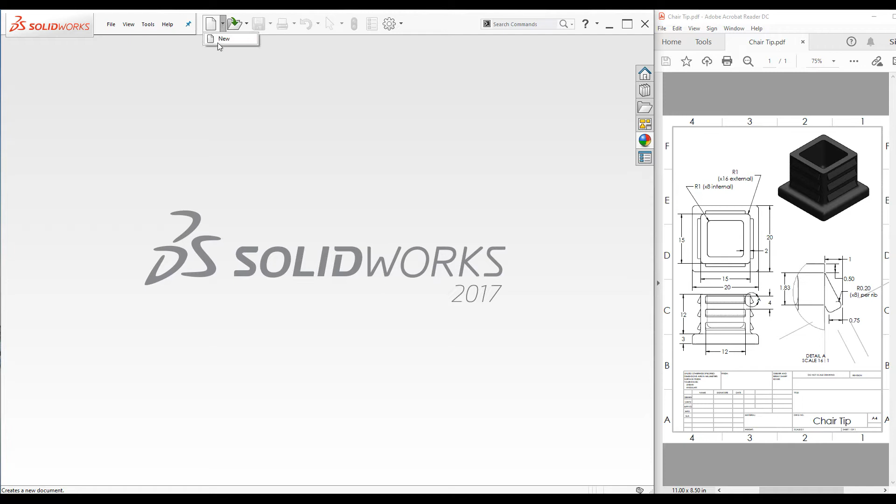In this video I am going to model this chair tip using basic SOLIDWORKS commands. Let's get started and stay tuned. To start off, open up a new part file, click on new, select the part template and click OK.

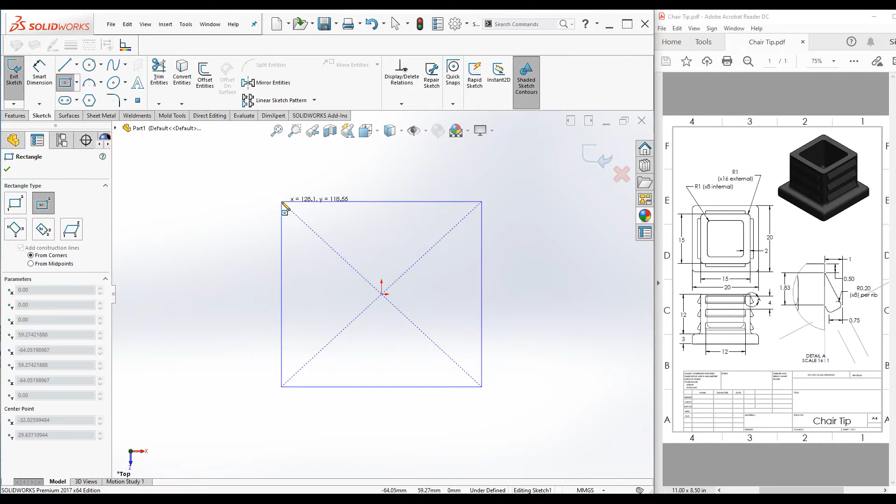Let's begin the sketch on top plane to create this base extrusion. Select top plane and from the context toolbar select sketch. Now we are in the sketch mode. Expand the rectangle tool and select center rectangle. Draw the sketch starting from origin. Dimension the sketch 20 by 20. Select dimension and vertical 20 millimeter and horizontal 20 millimeter and click OK.

Now select the feature tab, click on Extruded Boss command. The extrusion is 3 mm, enter the value 3 mm and press tab key. You can leave the other options as is, the direction 1 blind, and click OK.

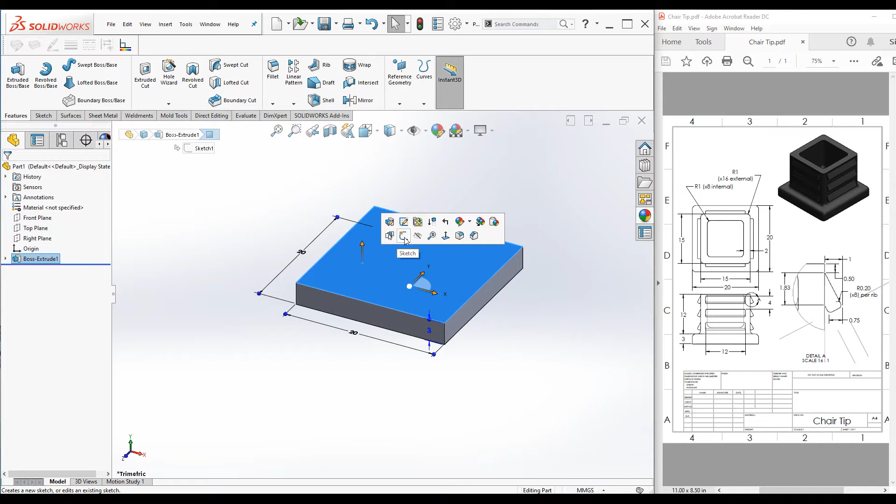Now select the top surface and again click on sketch command from context toolbar. Press Ctrl 8 to have sketch plane parallel to computer screen. Again select center rectangle, draw the sketch. Add dimension horizontal 15 mm and vertical 15 mm. Enter 15 and vertical enter 15.

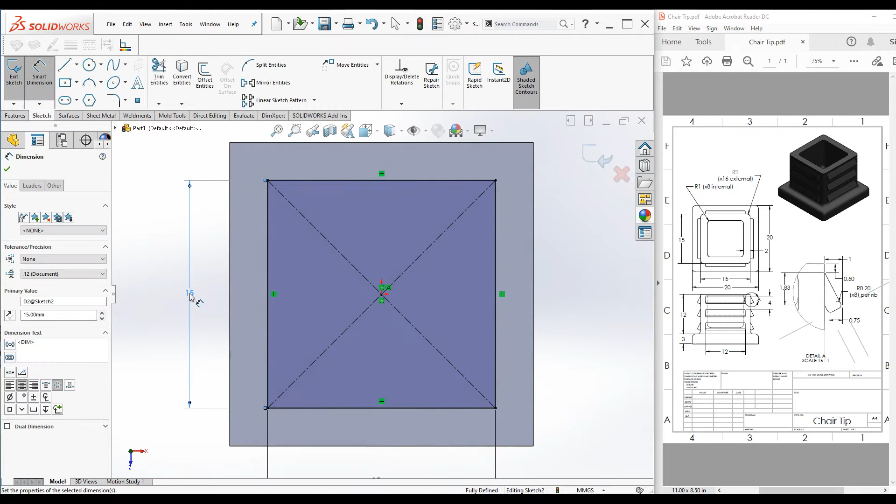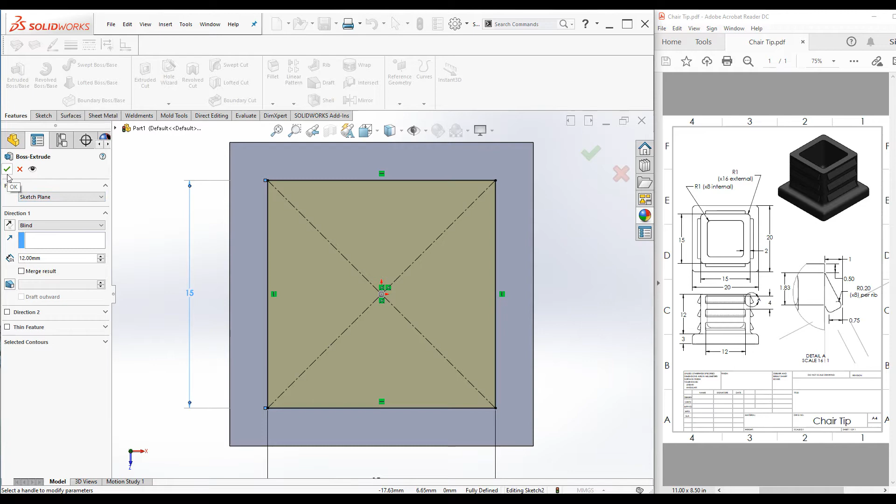Now again click on feature tab, select Extruded Boss command. Over here the height of the extrusion is 12 mm, enter 12 mm and make sure this merge result option is unselected. We need to have two separate bodies to perform the next operation. So press Ctrl 7, and preview looks good and click OK.

Now we are going to create this cutout using shell command. Since we did not merge these two bodies together, you can see there are two solid bodies created. Now go ahead and click on shell command. Shell property manager is presented. Under this selection box, faces to remove, select the top surface. Now click on show preview and enter the thickness value 2 mm.

You can see the preview looks good. You can select this option if you want the shell to be outside, but we need it inside, and all the parameters are selected. Preview looks good and click OK.

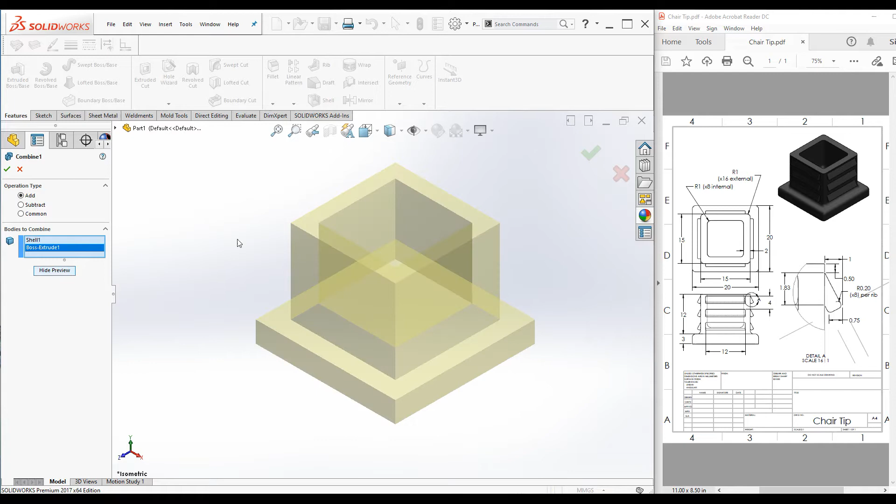Now we can use the combine command to merge these two solid bodies together. Click on insert, select features and click on combine. Operation type add, under bodies to combine, select top body and bottom body. Show preview, preview looks OK, click OK. Now we have one single body.

The next feature is the rib feature. This rib is used to secure the chair tip firmly to the leg. This is not the rib feature that we discuss in SOLIDWORKS. These are not the same, so I'm not going to use the rib command, and to create this rib feature I will use Extruded Boss command.

Let's begin the sketch. Select front plane and select sketch from context toolbar. Press Ctrl 8 to have sketch plane parallel to computer screen, select line tool and draw a 4-segment profile which is approximately similar to the shape of the ribs. You can see the details of the rib from this detailed view. So I will start from here and draw a 4-segment profile like this, and exit the command.

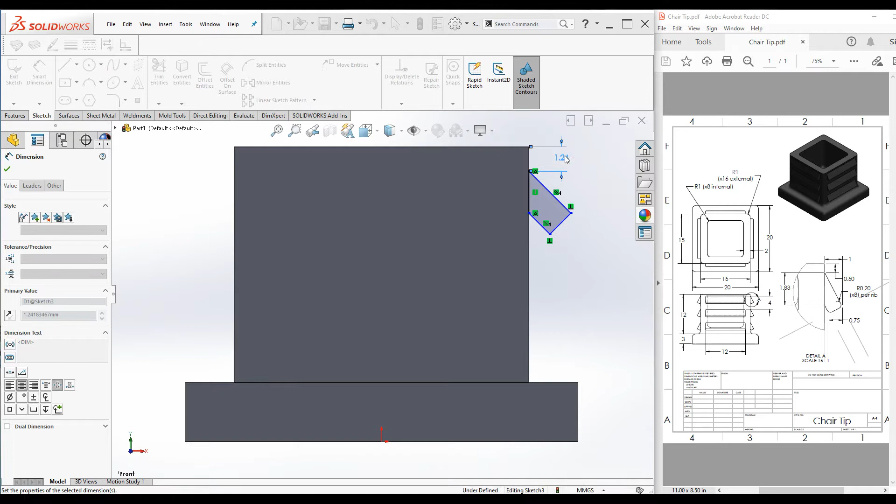Now let's add dimensions and relations. These two are parallel to each other. Select this line, press Ctrl and select this line. Then from this property manager select parallel and click OK. Now let's add the other dimensions. The dimension to this point from top is 0.5 millimeter, and dimension from this point to this edge is 1 millimeter.

And dimension from this point to this point, oops, I will drag this line a little bit down, and let's add dimension 0.75 millimeter from this point to this point. Select this point and select this point, enter 0.75 millimeter, and this line is 1.53 millimeter. 1.53, press enter, and sketch is fully defined.

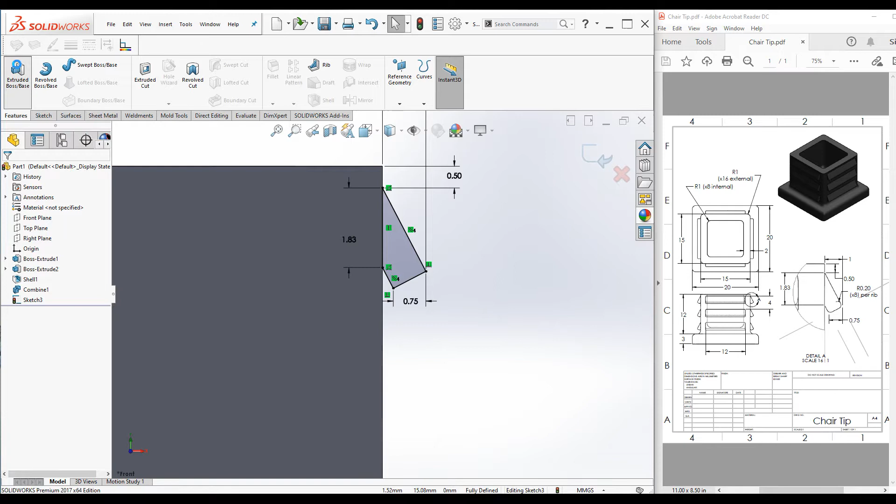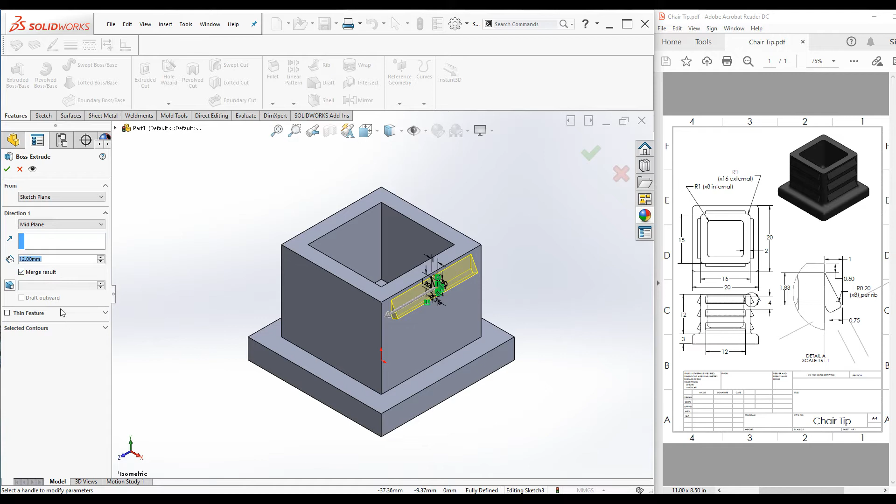Now exit dimensions, go to features, select Extruded Boss command, click here and press Ctrl 7 to have isometric view, and under direction 1 change the end condition to mid plane, and overall extrusion length 12 millimeters. We can keep this option selected, merge results. Don't worry about the other options and click OK. Here we go.

Now let's add the fillet feature to the rib, which is 0.2 millimeter fillet radius. There are 8 fillets per rib: 1, 2, 3, 4, 5, 6, 7, 8. Total 8. Press Ctrl 7. As I mentioned in my previous tutorials, it is always good practice to leave fillets and chamfers towards the end of the design. But in this particular case, we need to add the fillet feature to the rib so that we can use it in the next operation.

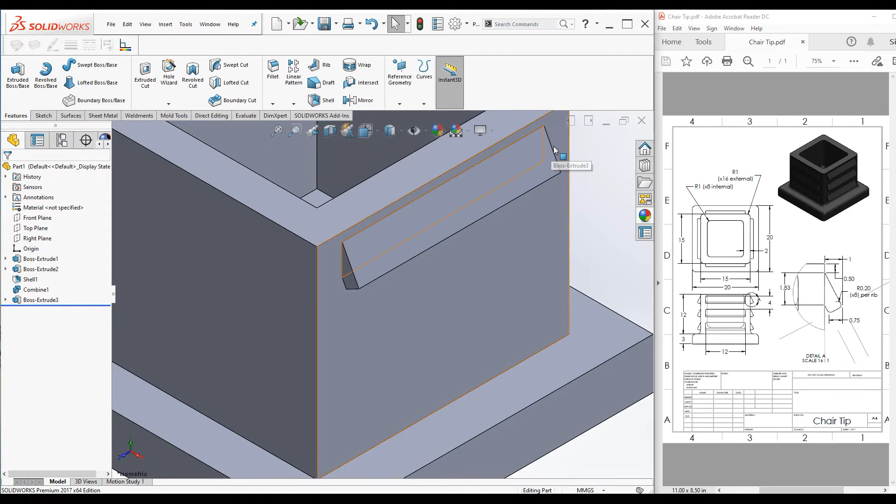We are going to create the other instances using pattern feature. In order to create other instances, we need to have a completed rib including all the fillets. So we need to add fillets to these ribs. Go ahead and click on fillet command under feature tab, and here we have got 2 options. We are not going to discuss FilletXpert today, so use this option, and the fillet type is constant size fillet.

Under items to fillet, we are going to select these 8 edges and make sure show selection toolbar is checked so that we can quickly select a set of entities together. We don't need tangent propagation for this particular rib, and make sure full preview is selected. For fillet parameters, keep it symmetric and enter the value 0.2 millimeter.

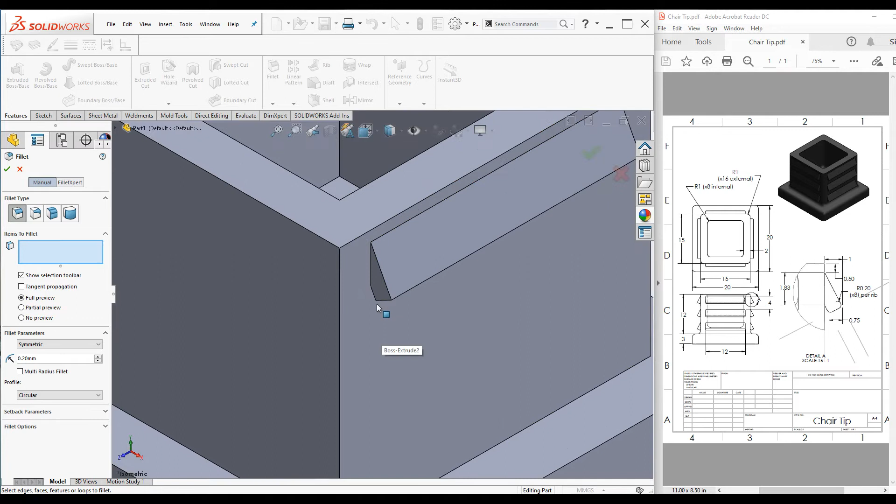Press tab key. We don't use multi-radius and profile is circular. You can leave other options as is. Now let's select edges under items to fillet. When we click on one edge, the pop-up toolbar appears, which helps you to select a set of edges at the same time quickly. This toolbar appears when you have this option selected, show selection toolbar. Click on one edge, then you can see the selection toolbar appears.

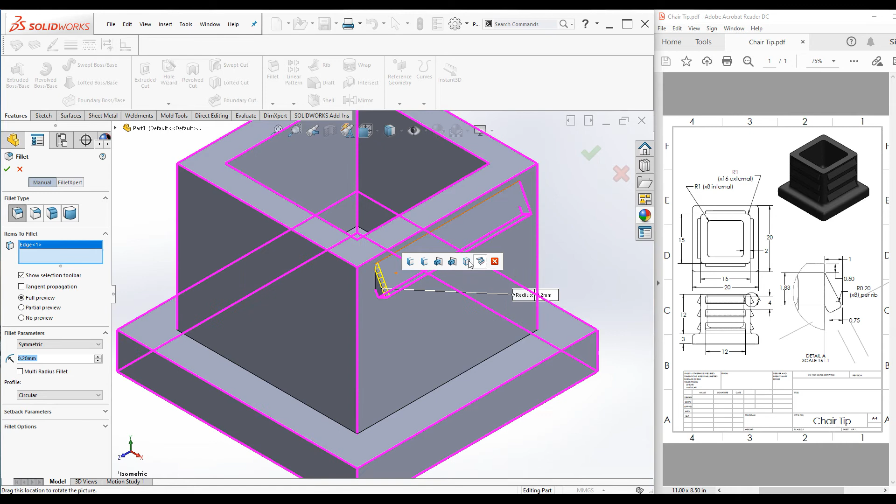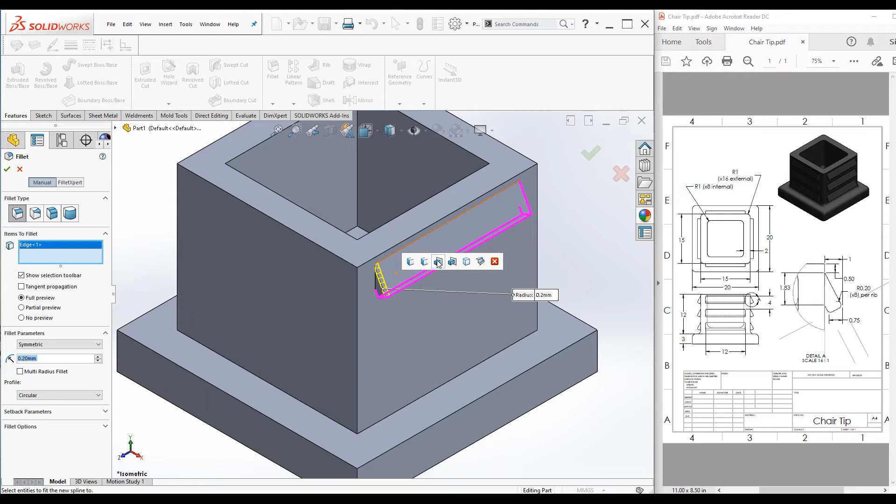So hover your mouse over each icon, then when you get the highlighted edges as per your needs, click on that icon. So this is what we need. Total internal to feature 7 edges, including the selected one, total 8 edges. You can see the preview and click on this icon. All the 8 edges are selected and preview looks good. Click OK. Press Ctrl 7.

Now we are going to use linear pattern command to create other 2 instances on this same surface. Go ahead and click on linear pattern command under feature tab, and the linear pattern property manager is presented. Since we had selected these features, they are already selected under features and faces. Look at this property manager. We have to select the direction. I will select this vertical edge, and you can see the preview since the fillets are already selected.

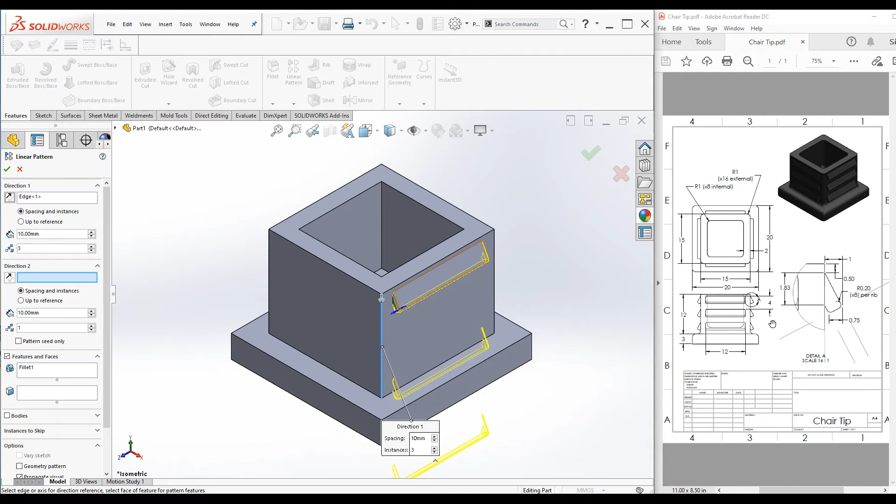I will reverse the direction, and here is the spacing. I will change the spacing to 4 mm. Between the 2 ribs it is 4 mm. And next, number of instances I will change to 3. We don't have direction 2, leave it empty. And under features and faces, here we can select faces to pattern, here we can select features to pattern, and also you can select bodies to pattern. In this case we don't have any bodies to pattern, so we are going to use this option, features to pattern. The fillet is already selected.

I'm going to select the last extrude feature of the rib. Now preview looks good, spacing 4 mm, 3 instances. You can leave other options as is. You can have this full preview and click OK. Here we go.

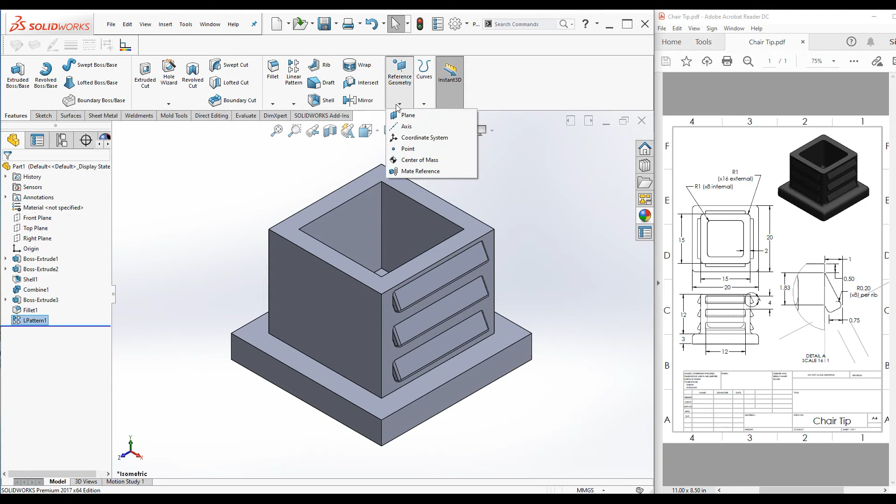Now the last command. We are going to use circular pattern command to create all other instances. Go ahead, expand this linear pattern command and select circular pattern. Before that, we need to do one more thing. We need to create an axis, pattern axis. I'm going to use reference geometry command. Expand reference geometry, select axis. Under selection, select front plane and select right plane. Axis is created at the intersection, which is the origin of the part. That is what we need, and click OK.

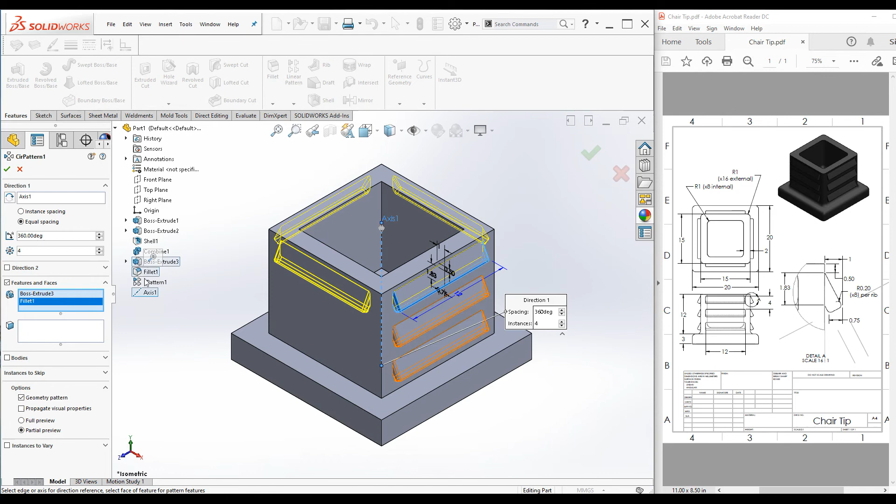Now we have created the axis for revolution, and go to linear pattern and select circular pattern. Under direction 1, pattern axis, select the axis that you just created. Keep equal spacing, angle keep 360 degrees, instances as 4. We do not have second direction. Under features and faces, select last extrude of that rib, select fillet feature and select linear pattern feature. You can see the preview, and also make sure for this operation geometry pattern is checked.

If it is not, click on this, see what will happen. You can see rebuild error. Usually this happens when we try to pattern a fillet feature. So if this happens, always use geometry pattern option. It will give you the same results. So now every option is selected and click OK. Here we go. Right click on axis and hide the axis.

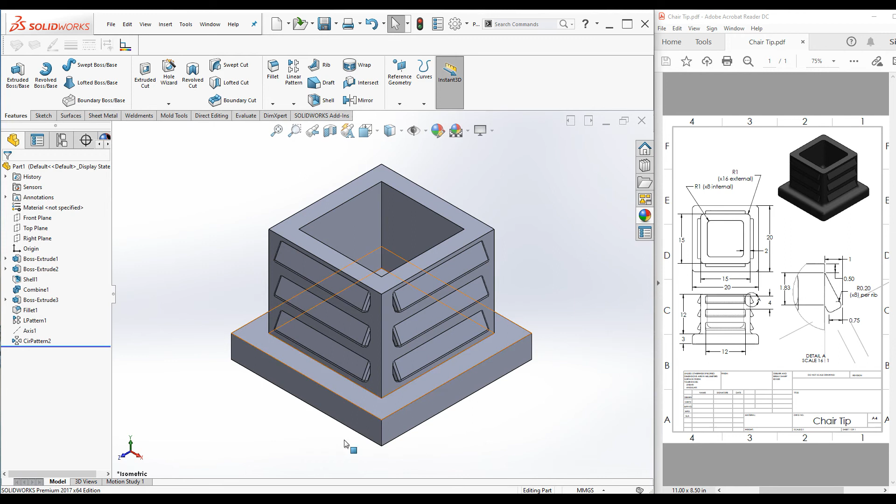Now the last operation, which is the other fillets. We will have 8 internal fillets and 16 external fillets. Both are 1 mm radius. So let's go ahead and click on fillet command. Use fillet type as constant size. Let's use this show selection toolbar option so that we can select a set of edges at the same time. Fillet parameters, keep it symmetric and change the radius to 1 mm. Press tab key.

And now let's start selecting edges. Click on this particular edge and use selection toolbar to select all the edges at the same time. When you hover your mouse over this icon, you can see 8 edges are highlighted. So click on that icon. So 8 edges are selected. Those are internal edges. Now there are 16 external edges. So let's try to add them to the same selection box. Click on this particular edge and hover your mouse over each icon. See if you can highlight all the edges at the same time.

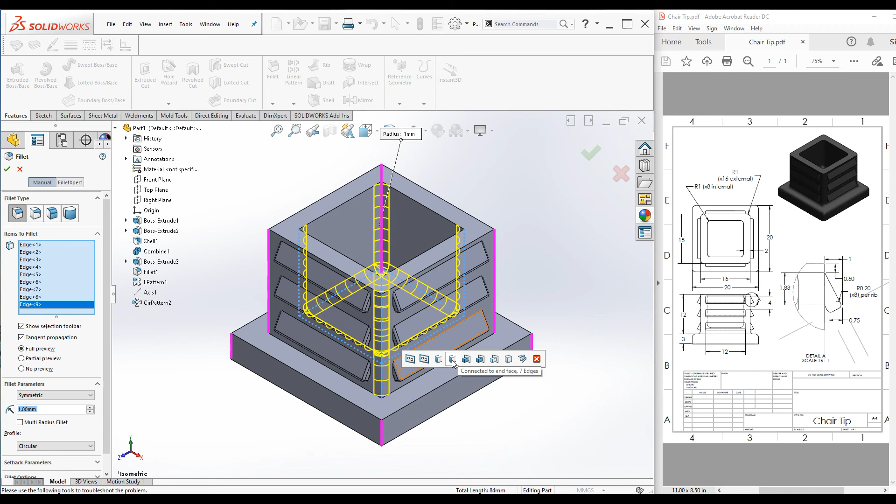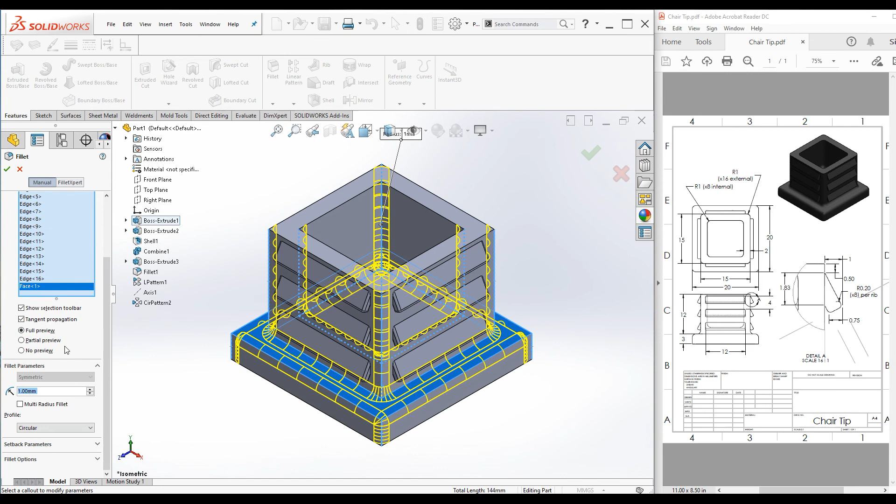Now I will use this option first to select 8 more edges. Total 16 edges are selected. Now we need to select these 4 edges and these 4 edges. I will directly select this face. All the edges are selected. Preview looks good. Options are selected accordingly. Click OK. Press Ctrl 7. Now we have completed the part. The last few steps are remaining.

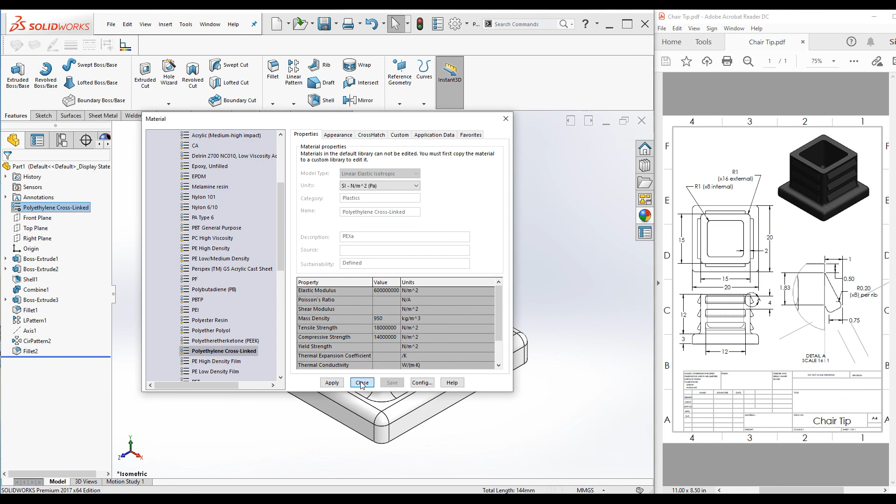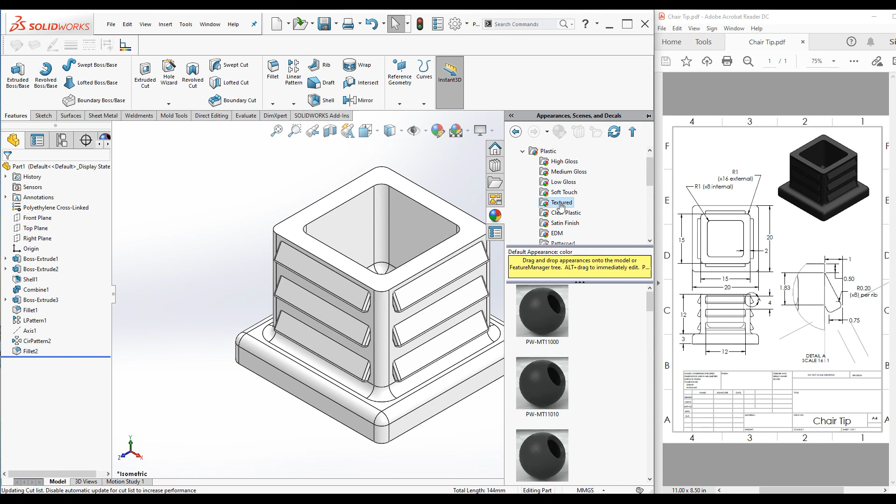Let's add the material. Right click on material, go to edit material. Under plastic, I will use polyethylene. Click apply, close. Polyethylene is applied. Now let's add appearance. Most common appearance of a chair tip is black color, so I will apply this color. Click on appearance tab on task pane, expand plastic, go to textured and select one of these colors. Double click on the color, it is applied. And now press Ctrl 7 and save the part and click OK.